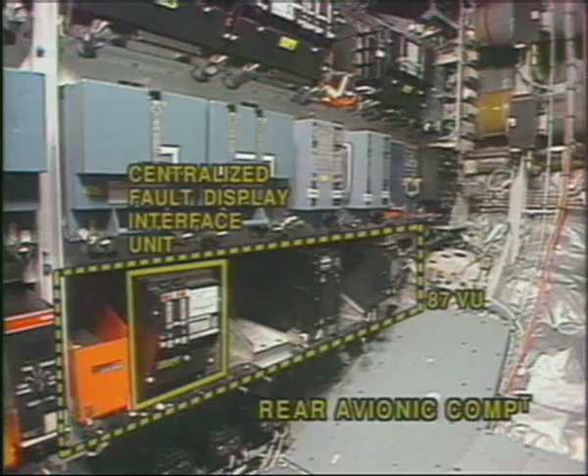The system computers transmit fault data to the Central Maintenance Computer or to the Centralized Fault Display Interface Unit, which generates the post-flight report. The system fault is recorded in the aircraft logbook. The post-flight report is available after the aircraft lands.

Maintenance Control, Air 1, we're on the ground and we have an in-op APU. Parking engine shutdown checklist is complete and maintenance has been informed of the APU inoperative. Thanks. I hope that maintenance can correct the problem so that we can depart on time for the next leg.

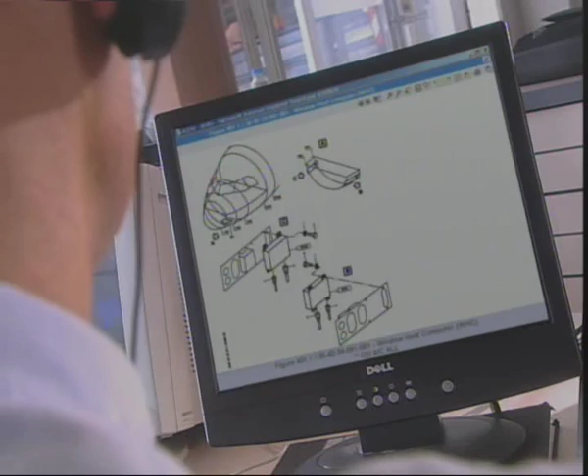Delays and cancellations can be minimized by utilizing proper troubleshooting techniques and the efficient use of the aircraft maintenance documents. The documents include the troubleshooting manual, the aircraft maintenance manual, and the illustrated parts catalog.

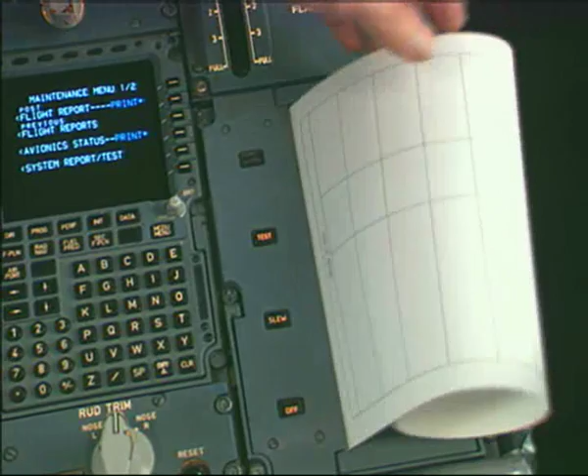The troubleshooting procedure begins with a logbook entry or a post-flight report. The post-flight report data is presented in two different formats. The wide-body aircraft data is displayed in a horizontal format. The post-flight report data for the single-aisle aircraft is printed in a vertical format.

The post-flight report identifies the aircraft and flight number. The fault data includes the cockpit effects, which identifies the ECAM warning and the troubleshooting manual entry reference, the universal time coordinated, and the flight phase in which the fault occurred.

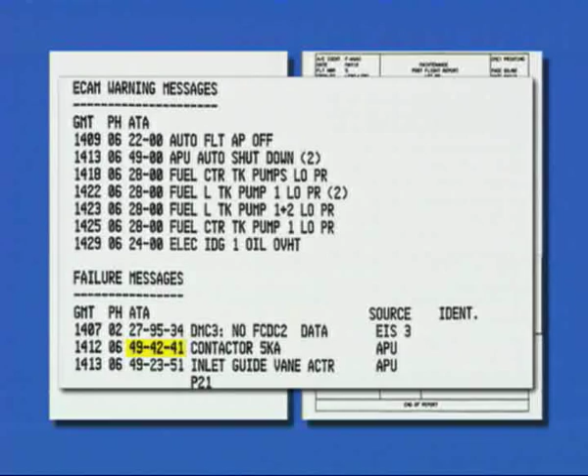and the faults which were detected by the Central Maintenance System computer. The CMS fault data includes the maintenance manual reference, the line replaceable unit and its functional item number, and the system component which generated the fault message.

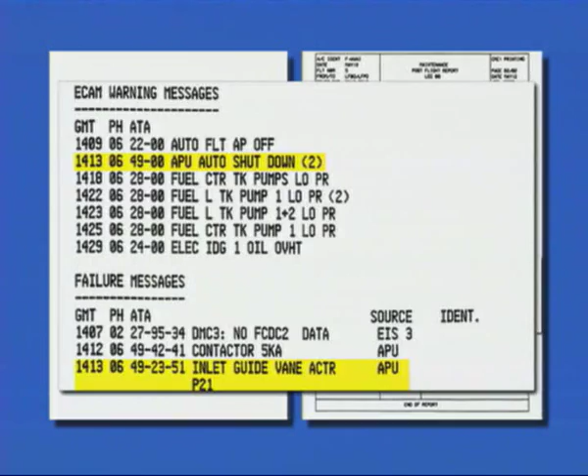Additional systems that may have detected the fault or may be affected by it are listed as identifiers. The post-flight report may list a cockpit effect and no associated fault data, a cockpit effect with associated fault data, or fault data with no associated cockpit effect.

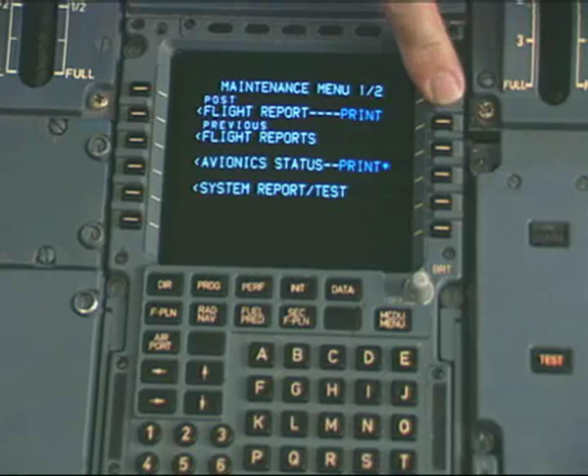The troubleshooting procedure for the single-aisle aircraft is identical to that of the wide-body aircraft. The ground engineer retrieves the post-flight report from the aircraft printer to begin the troubleshooting procedure.

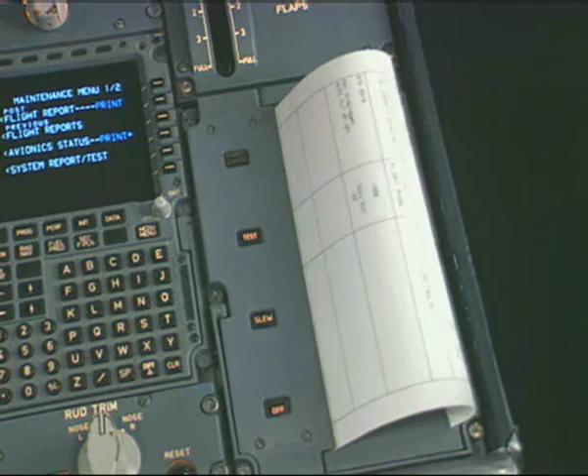The post-flight report contains data from the Central Maintenance System, or the Centralized Fault Display Interface Unit, which will assist the engineer in identifying and isolating system faults. The fault data is compared with a pilot logbook report.

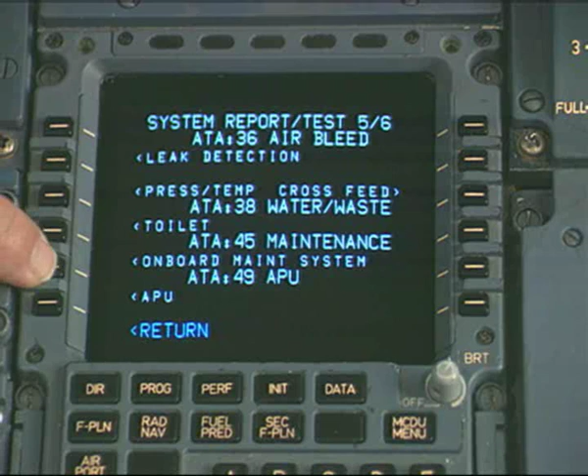Fault data history may be obtained from the affected system computer through the use of the MCDU CMS data link system.

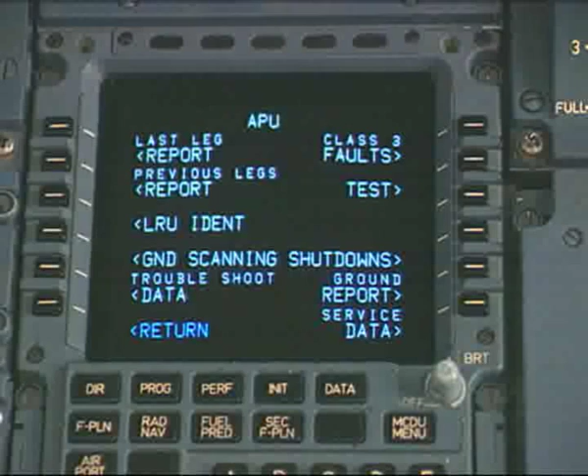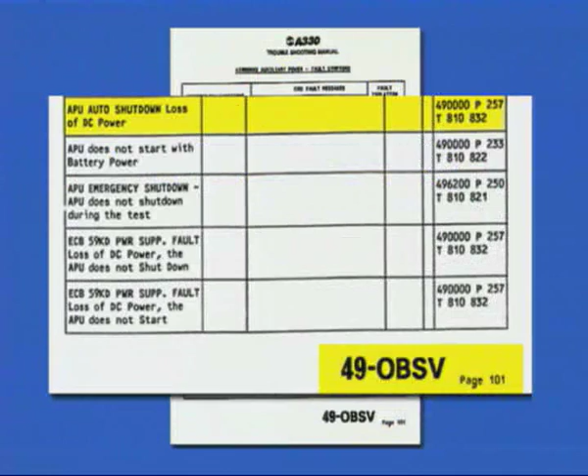The entry point into the troubleshooting manual may be determined by an ECAM warning, a fault message generated by the central maintenance computer or by the centralized fault display interface unit, local warnings or observations by the flight crew or by maintenance engineers, or by an INOP system or maintenance status ECAM display.

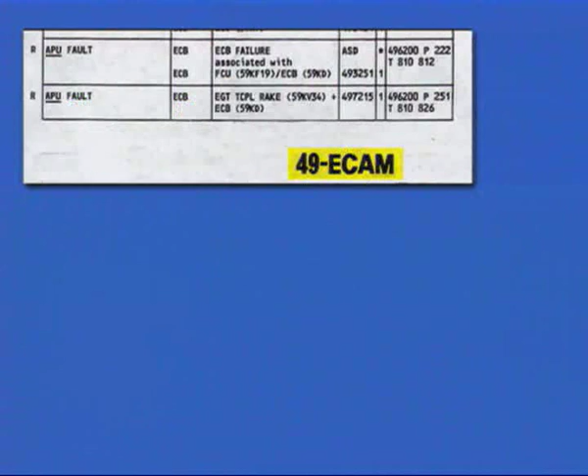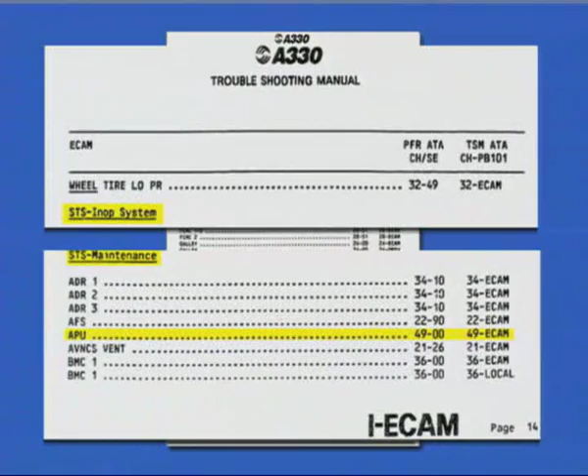The ECAM warnings, CMS fault messages, observations and status messages are listed in their respective troubleshooting manual index. The index directs the engineer to the fault symptoms sections located in page block 101 of the relevant aircraft system.

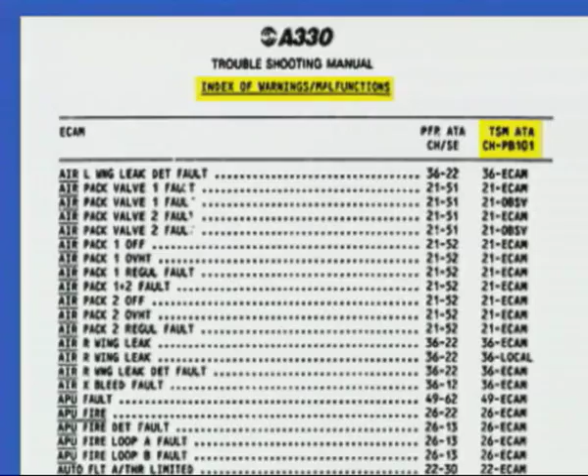Page block 101 ECAM section contains the list of ECAM warnings, identifies the source of fault messages, and correlates ECAM warnings with associated CMS fault messages.

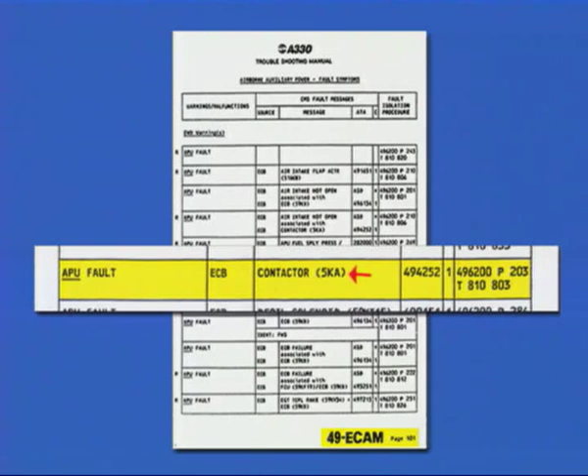The suspect failed components are listed and identified by their functional item number. The ATA reference number represents the maintenance manual reference for removal and replacement of the failed component, and the illustrated parts catalog reference for identifying replacement parts.

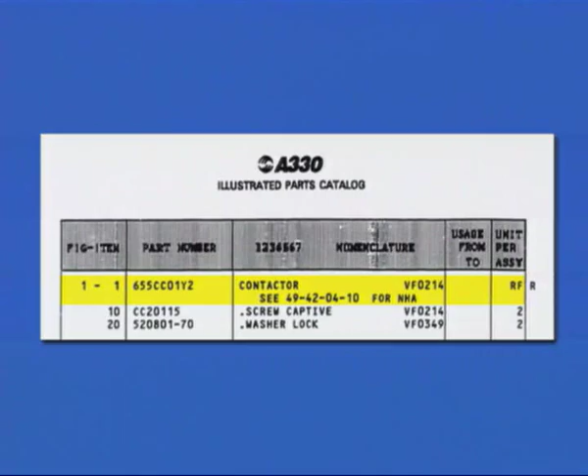The fault class or level may be a 1, 2, or 3. The fault class may determine the dispatch status of the aircraft. The fault isolation procedure column includes the troubleshooting manual reference and page number, and the fault isolation procedure task number.

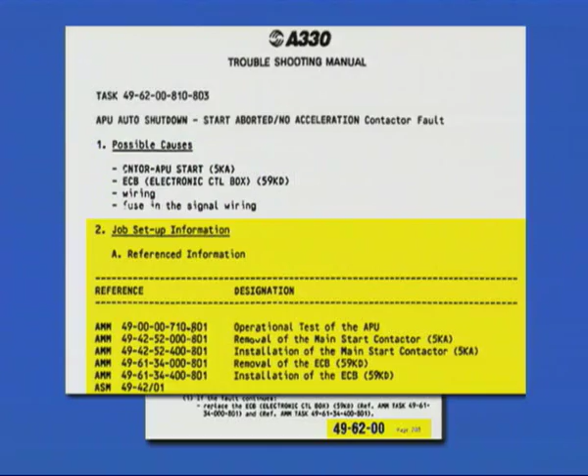The fault isolation procedure and task number are found in page block 200 of the troubleshooting manual. This section contains a list of possible causes for the failure, job setup information, the fault confirmation procedure, and the fault isolation procedure.

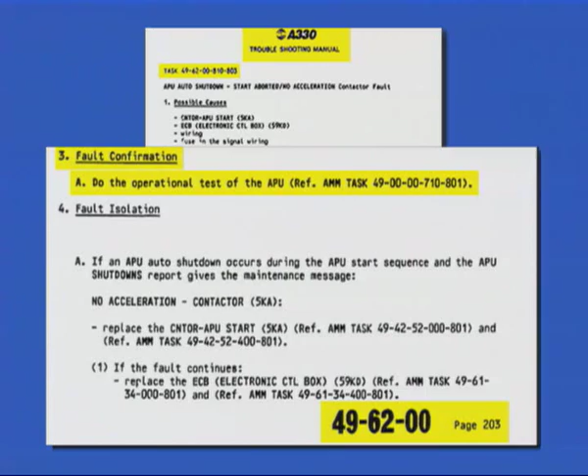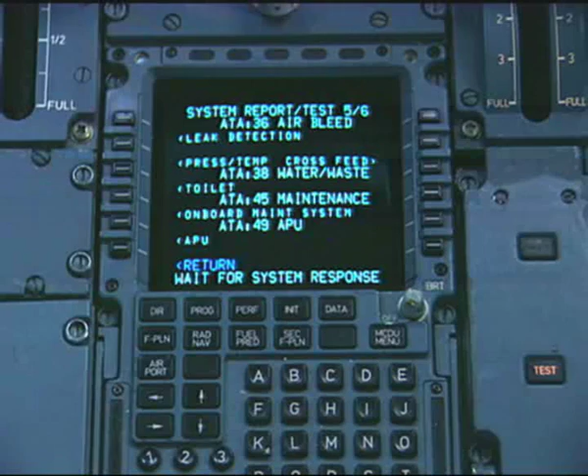The procedure may require a test of a system or line replaceable unit. If a test is required, the result is used to determine the next step in the troubleshooting procedure. If the test indicates that an LRU has failed, it is replaced in compliance with the aircraft maintenance manual.

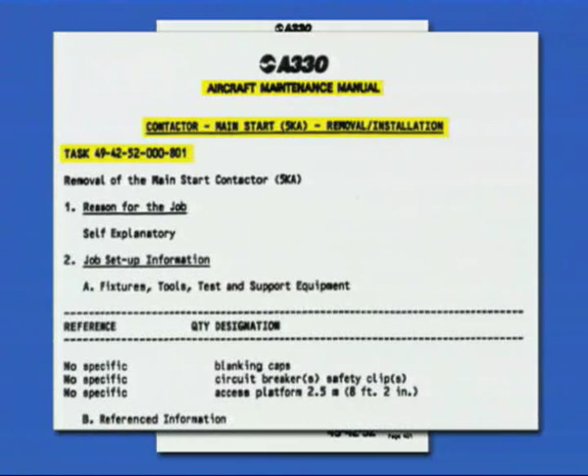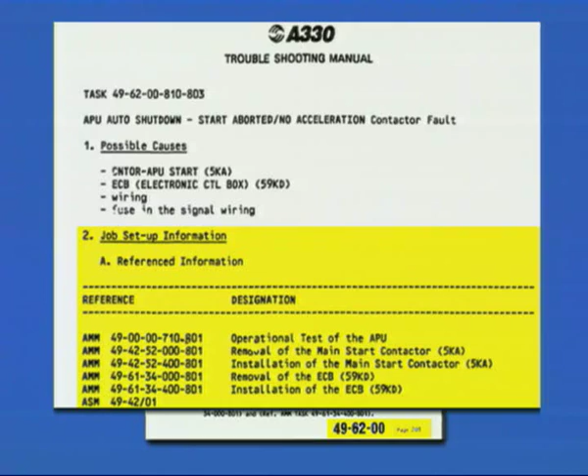The job setup information section of the troubleshooting manual includes a list of the tasks necessary to complete the removal, installation, and the test of the line replaceable unit or the system. If the test results indicate a failure, the additional fault isolation procedures listed in the troubleshooting manual will be accomplished.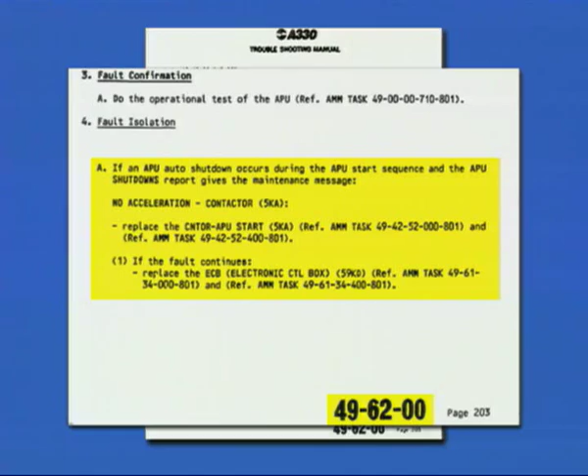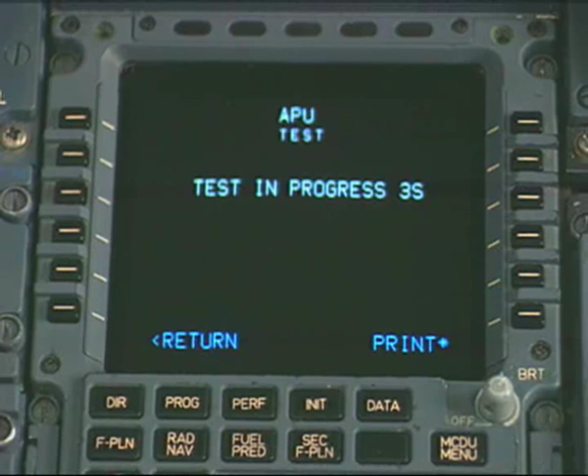If the test is satisfactory, the aircraft can be returned to service. The completed task is recorded in the aircraft logbook. The portability of the laptop computer provides the ground engineer with access to the manuals and documents required to troubleshoot while on board the aircraft.

The APU discrepancy has been corrected and noted in the logbook. Great. It looks like we can depart on time after all.

Sky 7, position and hold. Trans-East, taxi runway 9 left. Air 1, clear for takeoff. Contact departure control. Frequency change approved.